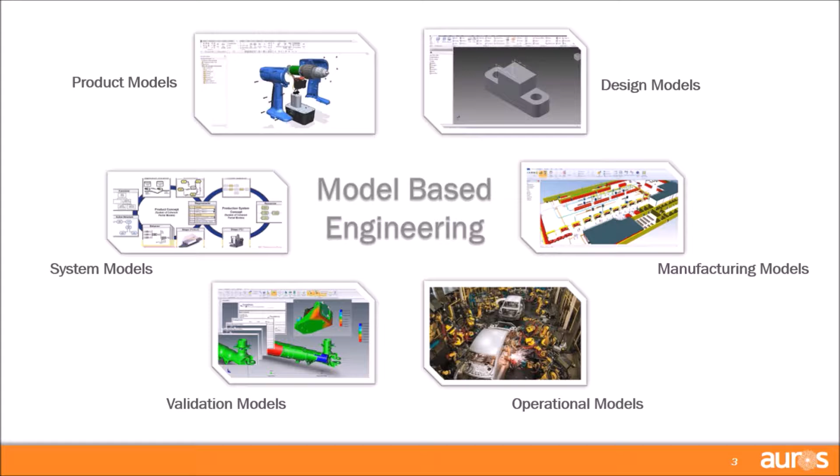We can also get details about those objects they're working on. There's tons of attributes and properties available, such as the material, what object state is it in? Is it a concept or is it a prototype? Is it in work? Just a wealth of information. CAD applications are ripe with content to use to detect and provision knowledge.

Now, one thing I often hear when I'm discussing this concept with people is that they often say, well, we have knowledge-based engineering, so our CAD application is already knowledge aware. And the integration of knowledge into CAD applications has been occurring for a long time, and knowledge-based engineering tools exist in just about every major CAD application. And there are tons of benefits to KBE, but there's also some limitations.

But the first misconception I want to talk about is: is KBE the same as knowledge aware? And what I'm going to say is, well, not quite, and here's why. There's three key principles to the knowledge-aware technique. The first principle is certainty and knowledge reuse. So does KBE have certainty and knowledge reuse? Well, sort of. For today's argument, let's just limit that focus to the CAD application, and we could say that, within that CAD application, that knowledge-based engineering tool does have certainty and knowledge reuse.

The second key principle is continuous product or process validation. Does KBE do that? Yeah, it does that, and it actually does that quite well. Within those CAD applications, or really whatever application that the KBE app is running in, it will continue to evaluate that model or drawing or simulation based on that app.

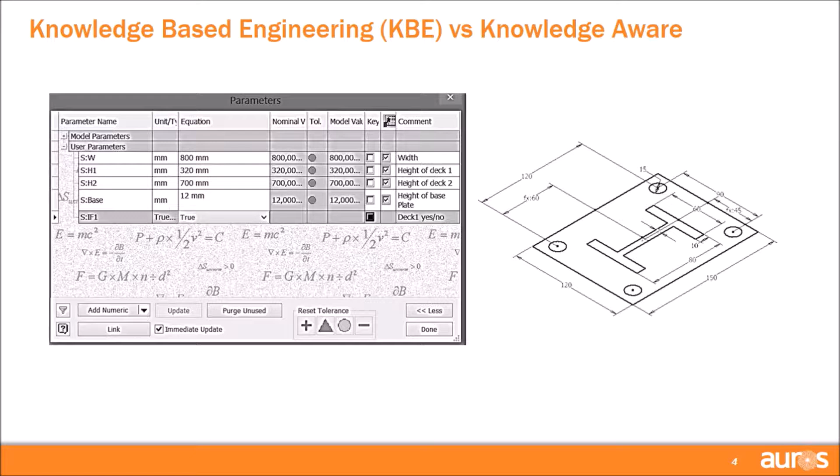So how does this all work? What's the details behind it? There's three key fundamental technologies that we use to make knowledge-aware work within CAD applications, actually within any application. The first is the knowledge packet. Second is an assessment control, which is like our navigation app. And the third is a rules processing engine. So let's break these down one at a time, just to give you a little bit of background as to what they are.

The first one I want to talk about is the knowledge packet. This is the what. This is the information that someone needs, the information that needs to be provisioned. Knowledge packets are purpose-built units of knowledge that represent a wide array of knowledge types. Knowledge packets are typically very granular and concise. And one key element about a knowledge packet is that during the creation process, it becomes ready for reuse. It becomes ready to be shared into many different workflows.

Now, when we're talking about CAD applications, there's a specific element within a knowledge packet that makes it very useful to share within a CAD application. This is called a value table. A value table is basically a little mini knowledge model. We can build these knowledge models within the knowledge packet and then distribute them into a CAD application. I'm going to go through that shortly. But this knowledge model can execute within those CAD environments.

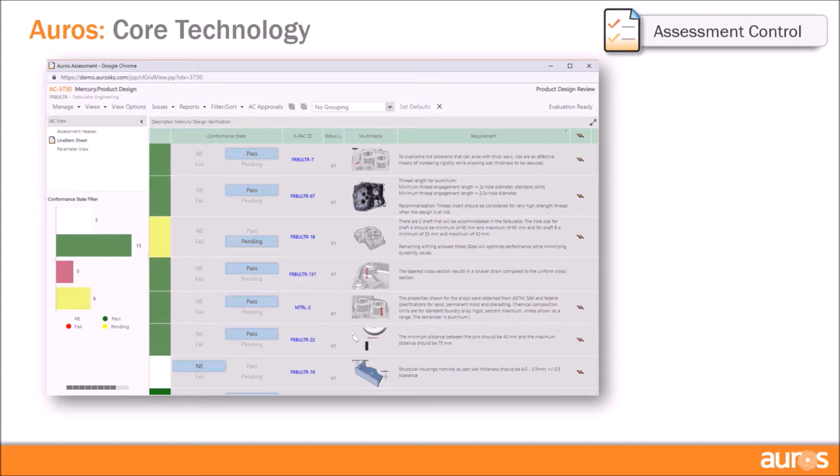Now, what you're looking at here is a grid view version of an assessment control where we can see status about a particular knowledge packet. When we're talking about CAD applications, we may want to take a different look at these knowledge packets, especially the ones that have those value tables, those little mini models, and maybe look just at the parameters. For that, we have an alternative view of an assessment control that strips out all of the other details and focuses just on the parameters and how they're being evaluated. This is often the view of choice for users connecting assessment controls to CAD applications.

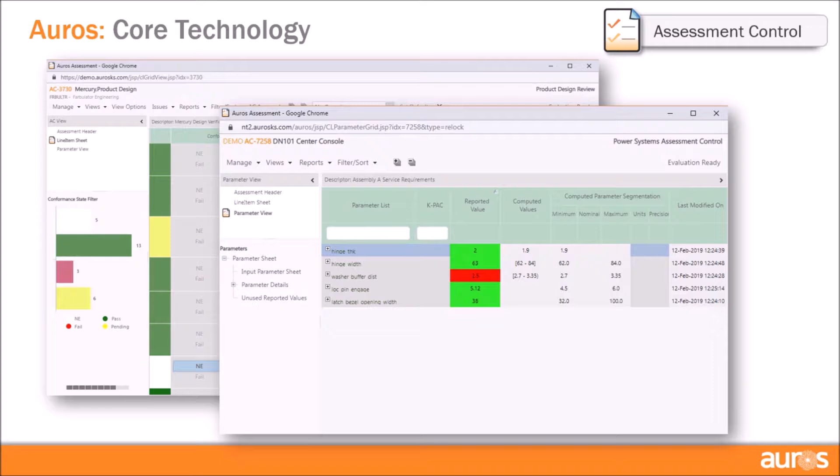Whatever these modeling tools are, the first thing that happens is we need to detect context from those tools and deliver that context to Auros. When we make that connection and that context is delivered, the relevant knowledge packets are collected and made ready to interface back to the CAD application. When we do that, those key parameters that we saw in the value table get passed from the knowledge packet, or an assessment control, to the modeling environment.

Now, when the parameters within that modeling environment are matched to the parameters that were delivered from Auros, with things such as features or properties or dimensions, the values for those objects get sent back to Auros for validation. This is where that rules engine kicks in. So based on those little mini models, when they're tied to a parameter value inside of the model, that gets pushed back to Auros, and the rule then gets evaluated.

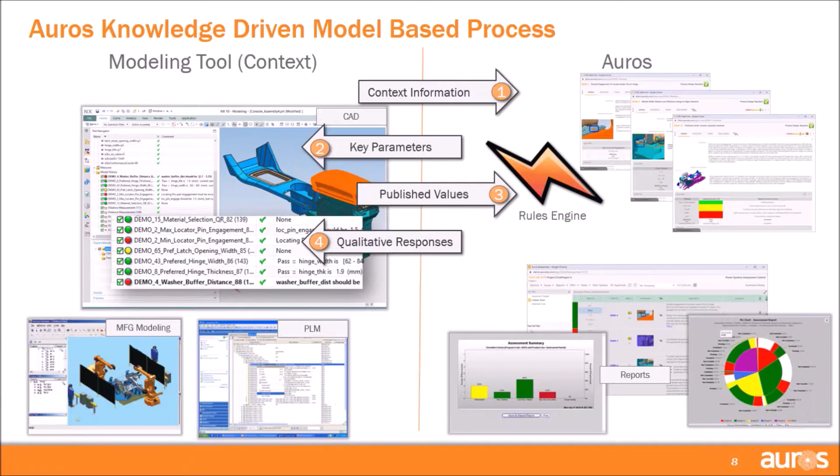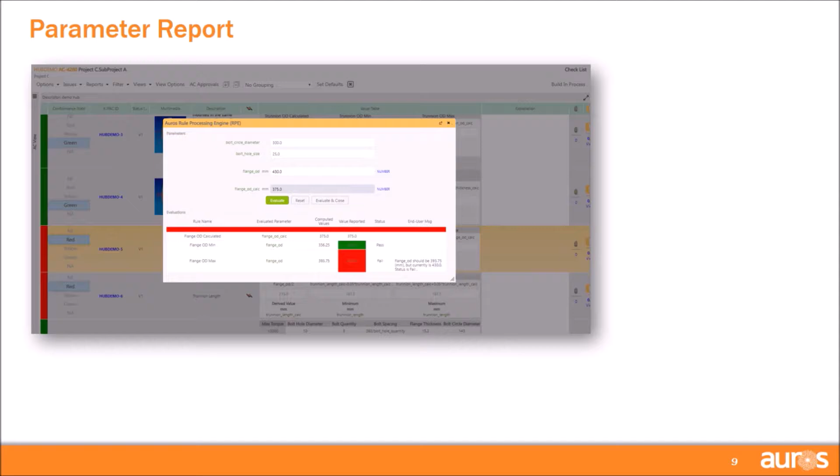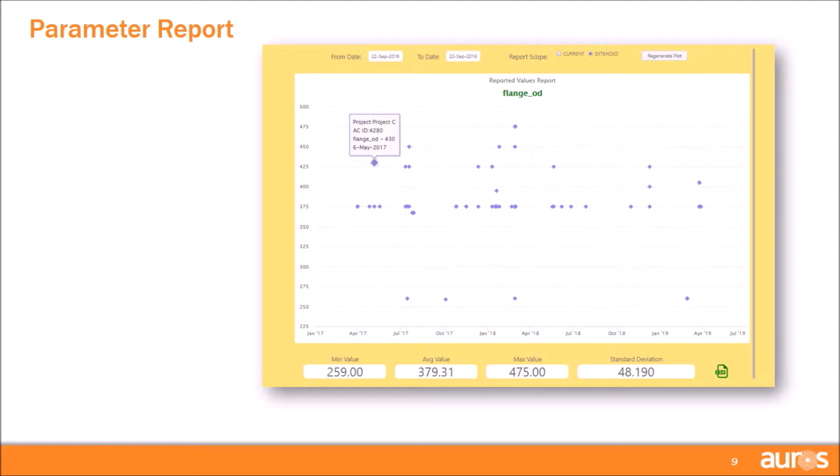And you can see 375 tends to be the most common entered value. And at the bottom we have some mins and maxes and standard deviations there. But this information is very useful when we're talking about learning from how knowledge was applied across past projects.

All right, enough about how it works. Let's talk about some common CAD Connector Strategies that we're going to review today. First, we're going to review nonparametric model validation. And I know many of you might be thinking, nonparametric model validation, we just talked all about all these parameters, and models are full of parameters. Why are we going to talk about nonparametric model validation?

That's actually another misconception I would like to clear up, is that you don't necessarily have to have parameters within a knowledge packet or within an assessment control and deliver those into a CAD environment. There's many workflows that really do not require that level of detail and require more of an attestation of the use of knowledge than the parametric validation of knowledge. So we're going to review that based on a shipbuilding workflow, and I'll go through that process.

Now the next one is freeform CAD, and I've demonstrated this strategy in the past. And freeform CAD is basically you take a model that doesn't have any parameters in it, and we manually attach parameters to the model to make it smarter and also detect status against that model. And I'm not actually going to go through this particular one today, but it is a very useful CAD connector strategy.

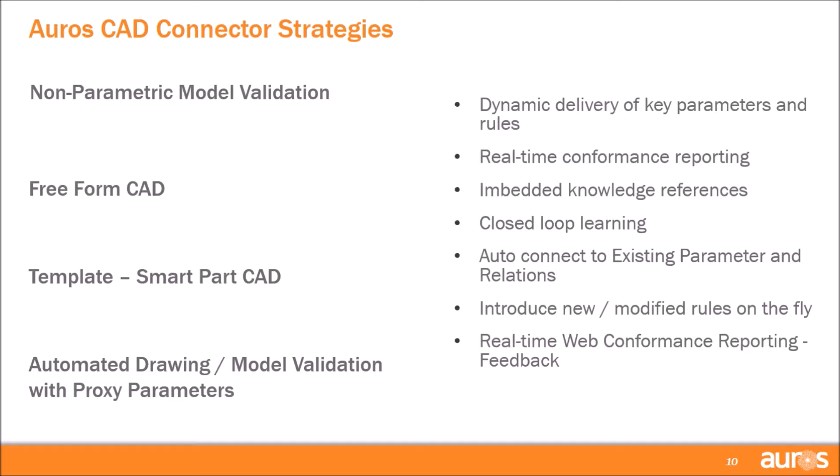You're going to see that closed loop learning, that third key principle that I discussed. You'll see how that information isn't just stored within the modeling environment, but it's also available for everyone outside of the tool, all these other workflows that may take advantage of it. Through some of the demonstrations, I'll show how we auto-connect to existing parameters and the relations. We're going to see new rules being introduced on the fly within the modeling environment. And then we're going to take a look at some of the reporting options and feedback that we get within the modeling environment as well as within Auros.

So one of the most commonly asked questions I get when I start talking about connectors is, which CAD applications can we connect Auros to? And I typically say all of them. But if we limit it to just the off-the-shelf connectors, we have off-the-shelf connectors for several of the major applications like Creo, SolidWorks, CATIA, NX, and AutoCAD. And not only just AutoCAD on its own, but for those of you in shipbuilding, we have a connector to ShipConstructor, which, as you would know, is an overlay that sits on top of AutoCAD. And this is actually going to be one of our demos.

So today, what I'm going to review with you is how the different workflows dictate the type of interaction needed by the Auros CAD connectors. And to show you that, I'm going to review 3 different connectors to see how they integrate the knowledge-aware approach. We're going to look at AutoCAD and ShipConstructor, the NX application, and we're also going to take a look at SolidWorks. So the first one we want to go through is non-parametric model validation. And like I said before, this was one of the misconceptions, that you have to have parameters to go back and forth between a model and Auros. And that's absolutely not true.

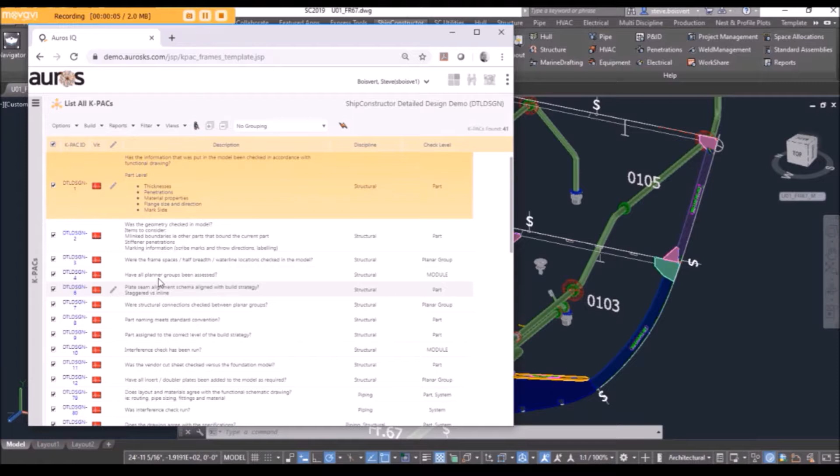What you'll see inside of Auros is, I'm going to start with the knowledge. So what was created? We have their knowledge repository, and what you'll notice is that these validations do not have value tables. I mean, this is a very simple check. Check the thickness, penetration, and material properties, but there's no value tables.

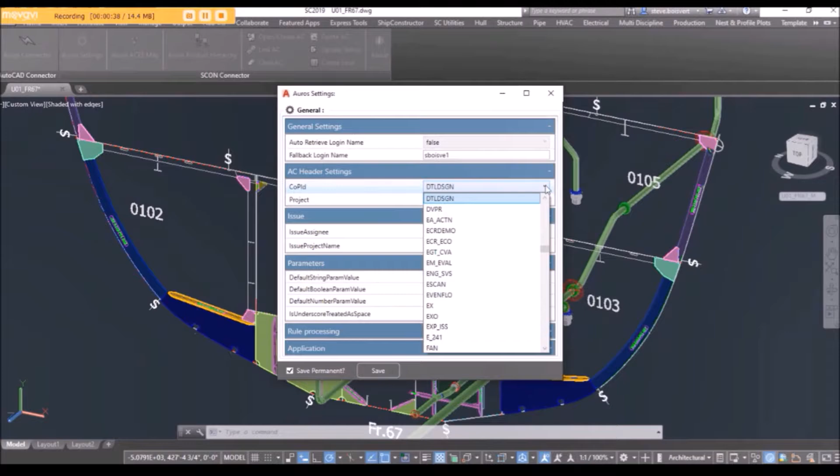So what we're going to see is how the Auros connector delivers knowledge, provisions knowledge in that workflow. And the first thing that the users do is they have to set up which knowledge they want to provision into the workflow. And for this, we define our knowledge source for detailed design. Another thing that they may want to do is to link certain CAD properties to certain Auros properties, which they can do here from this mapping window.

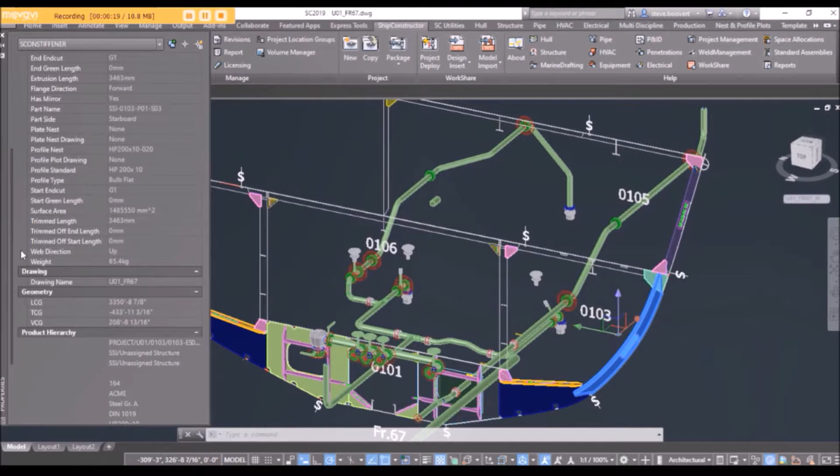And what happens now is when the checker goes into the CAD environment, they select an object, like we're doing here, and they can right-click to get a list of menus. And what I want to show you here, let's talk about context. If we look at the properties, this particular object is full of information we can use to detect context. Things like its profile type, its status, its thickness, its material, all that information's here. And for this workflow, what we need to know is whether it's a structural element, and which level, is it a part level?

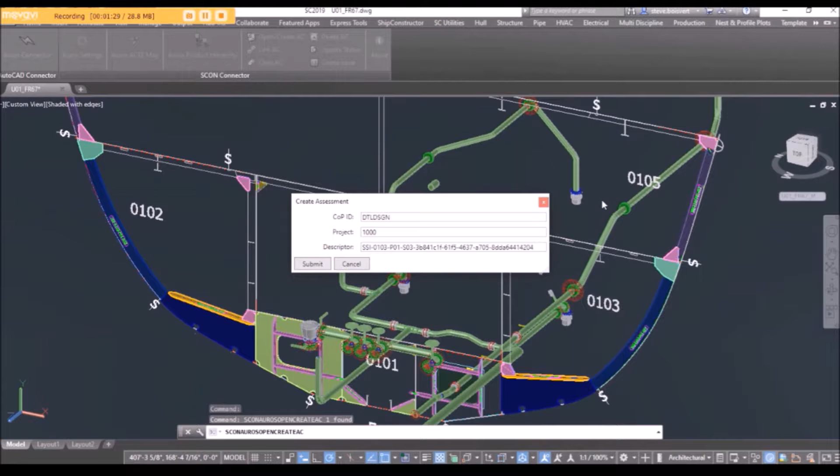And based on that, the users can create an assessment control. We can provision context of it being a structural element at the part level, send that to Auros, and Auros is going to allow them to develop an assessment for that object. And what you can see when we selected create an assessment, the assessment collected the right knowledge packets and delivered them back into the CAD environment in the form of an assessment. So let's take a look at this real quick. If we look at the Auros properties, we can see that an assessment was created on that part, it's evaluation ready, and the overall roll-up status is white or not evaluated.

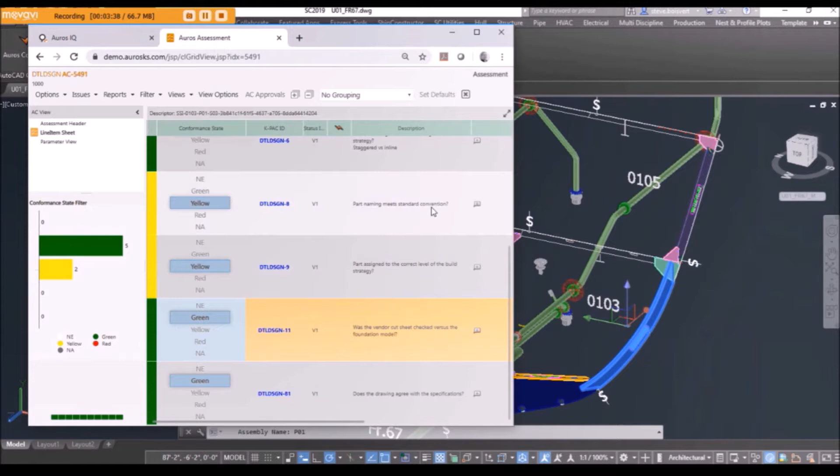So now we go in, open the assessment, and start to evaluate it. Remember, we're just going to attest that these things are right. So for my demonstration, I'm not going to put a lot of time into it. I'm just going to select some statuses, red, yellow, green. Maybe make this one green, and we'll do this one green, and now everything's complete. You see there's no more not evaluated. We can look at the header of the assessment, and we can see that information from the part was sent to Auros and stored within the assessment, like the part GUID, basically the ID for that part, as well as some other information, the product or project code.

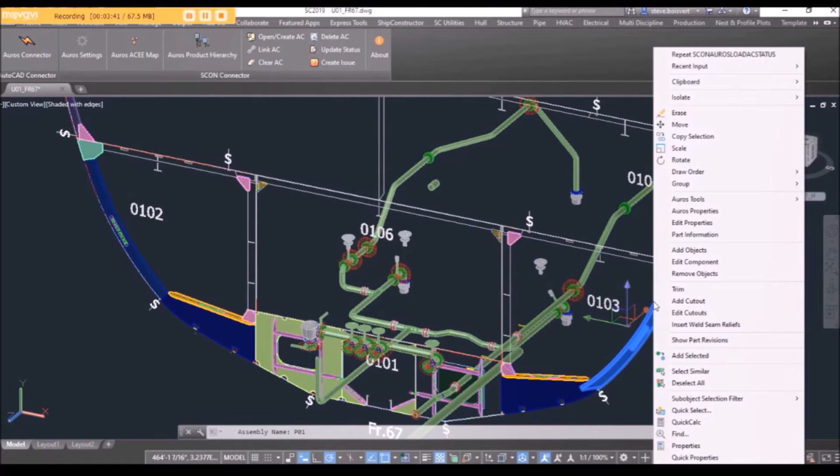But if we go back and look at those properties, what happened? We still have the assessment ID, but now the status is yellow. So when I was doing that evaluation, this part became aware of its rolled up status. So it's very beneficial to the individuals that check these components, because now that information is stored within the CAD application as well as within Auros. So if I wanted to report on which components I have checked, which ones I haven't, and what their statuses are, I now can very easily see that. So not only did we standardize the workflow, but we made it very efficient for the different checkers to get to that information and utilize it within the CAD application.

Now, the next demonstration I want to go through are template or smart parts. And for this one, I'm going to use NX, and then we're also going to see a little bit of this in SolidWorks.

So for this demonstration, we're going to start off in NX, and what you're going to see are two simple hub flanges. The one on the right is the actual part, the one on the left is just a dummy part, a clone. I do that so when we push information in from Auros, you can see the changes.

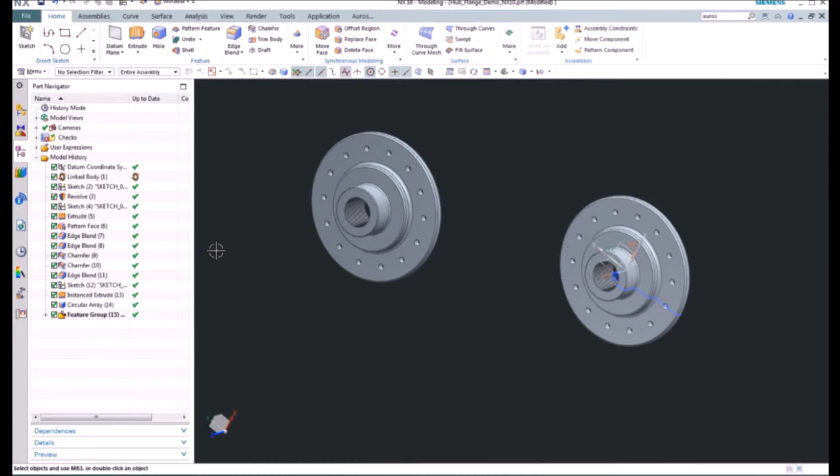So this workflow is a little different. We're not using the CAD application to send context. We're going to start from Auros to send information into the CAD model. And what you're going to see is the CAD model is already aware of parameters. You can see in the sketch here that it already is aware of the parameters I'm going to send from Auros to the particular model.

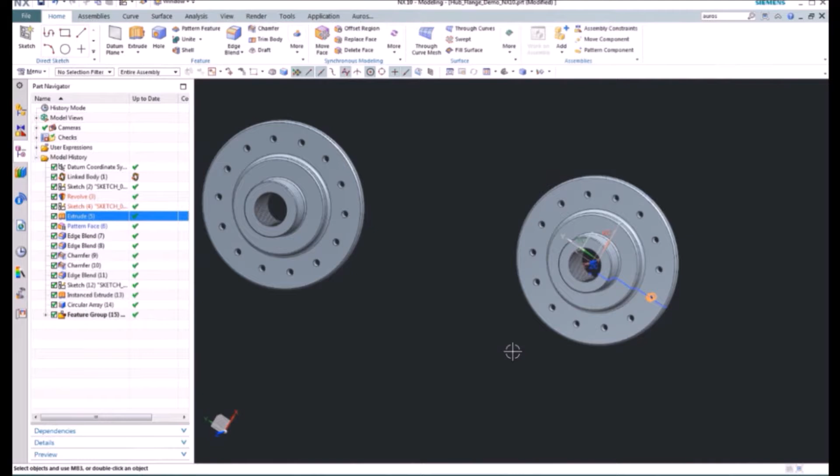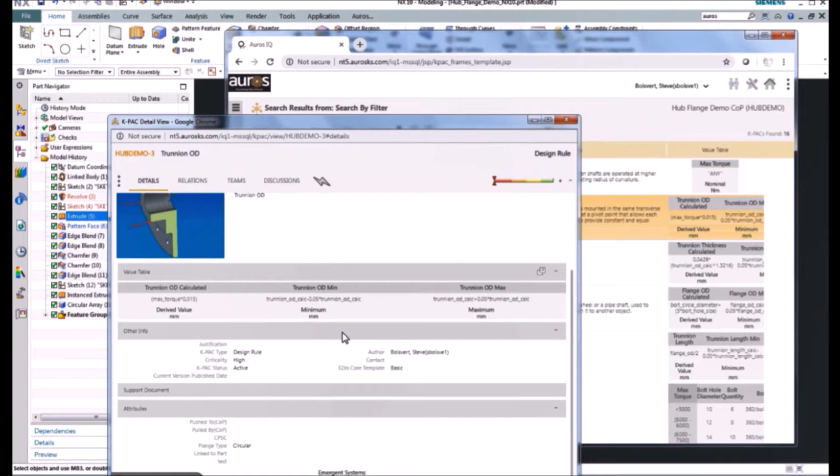So we're going to go to Auros, and for this we're going to open up our hub demo, and I'm providing context. So I know I have a circular smart part. For this, I collect the right knowledge packets related to the circular smart part, and you can see some of those here. What you'll notice is that the value table on all of these knowledge packets is completed, so there's some logic or many knowledge models built into every one of the knowledge packets.

So if we build an assessment control, we take that collection of knowledge packets and we're just going to give it a quick project here. I'm going to give it a description of 15,000 Newton meters.

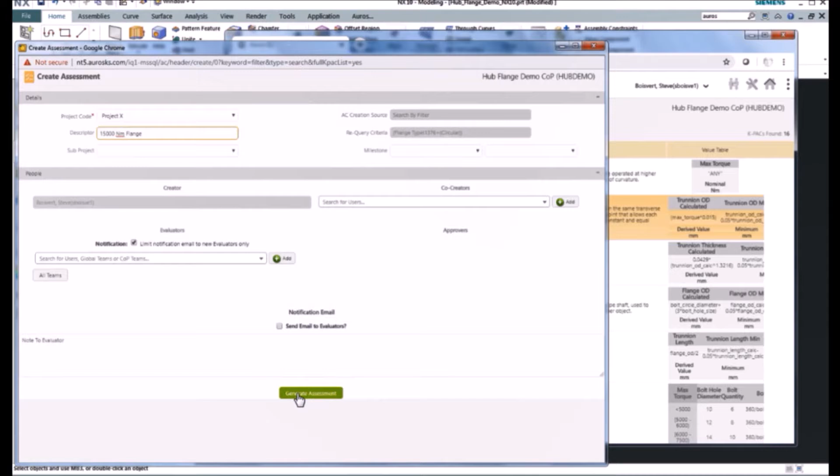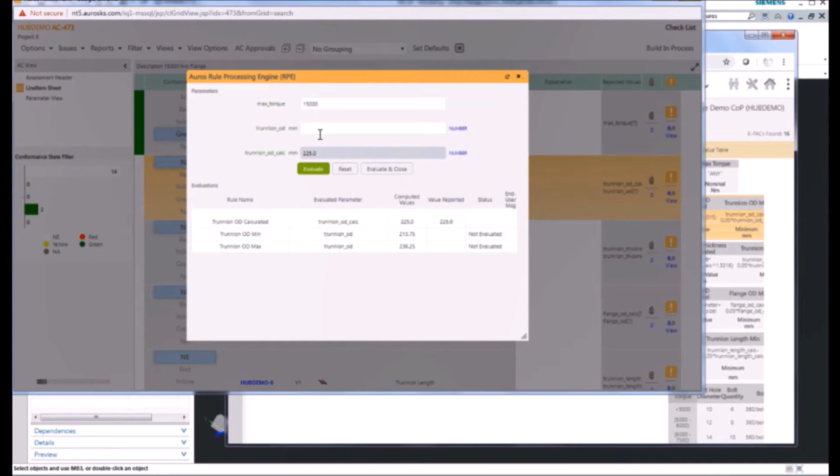This particular workflow is very reliant on the torque. So I have my assessment control in the detailed view, and if I click the rule processor, I'm going to put in my inputs. What's my max torque, 15,000 Newton meters. Maybe I got that from the customer or the sales team. But now that max torque is then sent into all of the other evaluations that need that input, and I'm able to start creating and generating values for all the different features of the model.

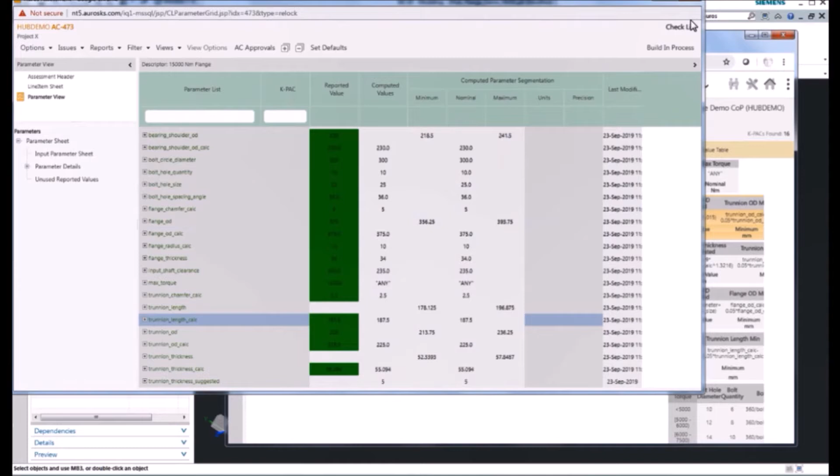Like I mentioned before, one of the key views for CAD applications is the parameter view. So we switch over to the parameter view. I'm looking at just the parameters that are needed, and I can see on the right-hand side what are the computed values, what are the max and mins within those computed values. So I'm filling out my, whatever you want to call these, maybe these are best practices or it's the design guide. I'm going to fill that out, and then I'm going to go to my CAD application.

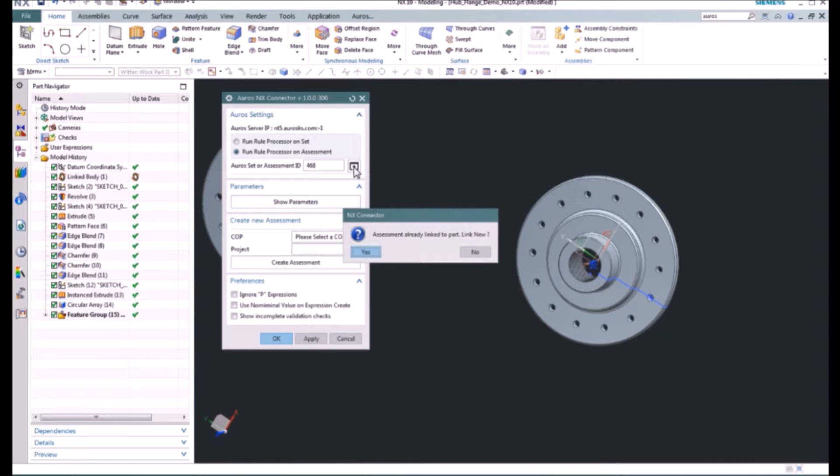Now within the CAD application and within NX, we're going to go to Tools, we're going to open up our Auros Connector, and then we are going to tell the Auros Connector which assessment to connect to. So we're going to connect it to assessment 468. And if we look at assessment 468, here's that 15,000 Newton meter flange, and everything is filled out, everything is green, meaning I'm meeting all of my best practices. What the system expects me to have, that's the values I'm providing it.

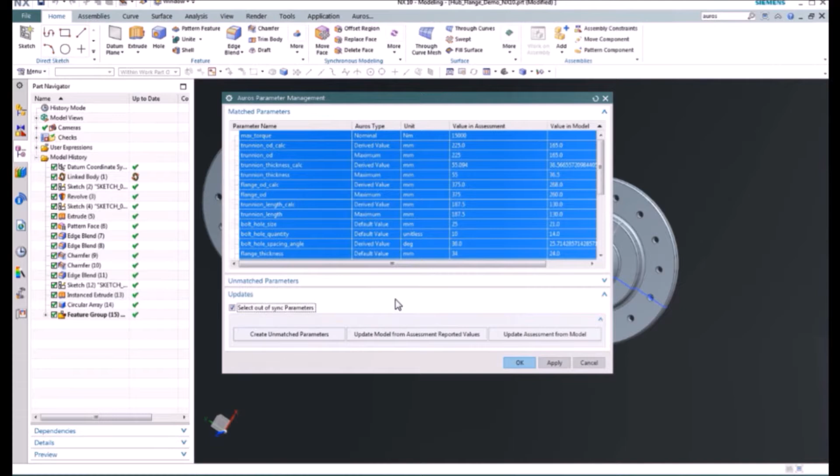So now within the CAD application, I want to look at the parameters. I can see the values in the model are not the same as the values in the assessment. So like flange OD is 260 in the model, 375 in the assessment. So I'm going to update the model from the assessment, basically push the values from the assessment into the model and see how it reacts.

So when I do that, the model updates, and what you're going to see is the status of that information has been provisioned into the model, and I can see the status within the part navigator. Here's all my greens, here's my links to my knowledge packets that are in that assessment control. So here's some of the parameters, like the flange OD that we've looked at before.

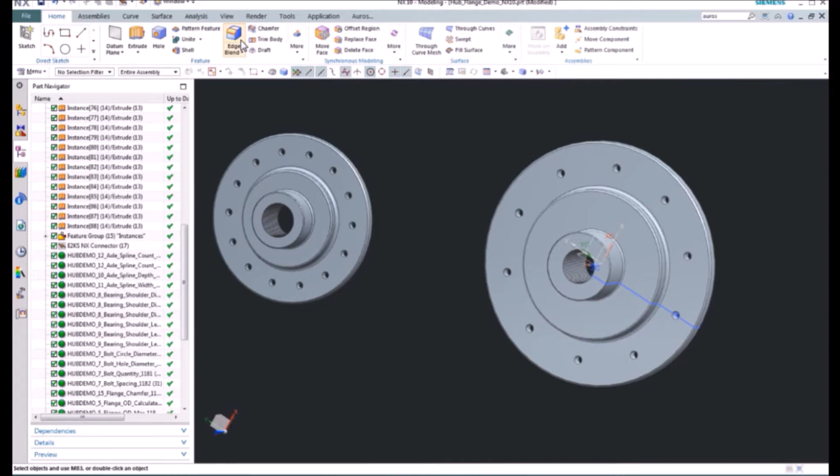And what happens now, we talked about continuous product and process validation. What happens if I change this? What if I decide to make it 450? So I can change that within the model, and the model is going to let me do that. And what you'll see is the flange radius increases.

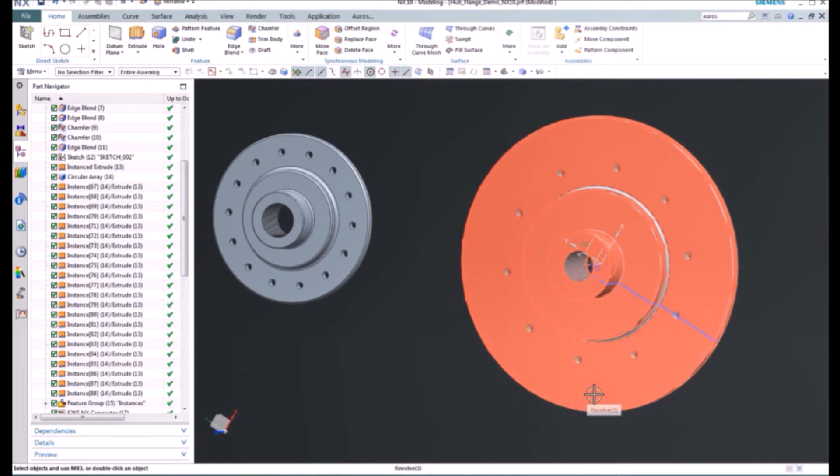And what happens now, if I look at the part navigator, my visual indicator of status now shows me that I'm red. And it's also providing me with some information. It's telling me that my max should be 393, but I'm currently at 450, so I'm failing, which is very beneficial information to someone working in the design environment.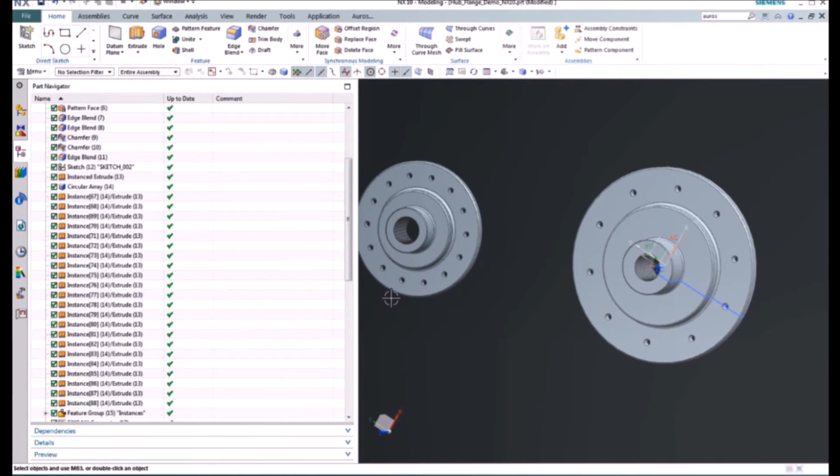So I'm going to set this back to 375, and the model is going to update back. And what you're going to see is I'm now back to green.

So let's switch over to SolidWorks. Same kind of model, same setup. I have my global equations here, with max torque, trunnion OD, the same criteria that I just saw in NX. If I look at my sketch, same thing here. I have my sketch defined.

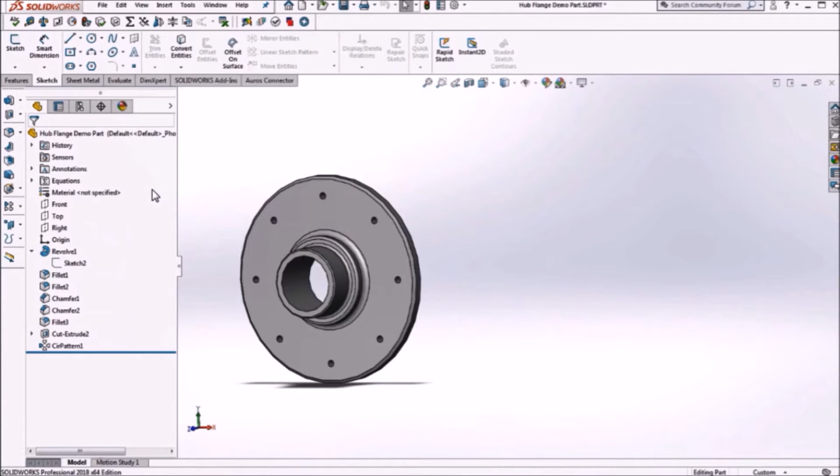I have those sketches linked to the parameters. So let's open up our Auros connector, our SolidWorks connector. It looks slightly different than the NX connector, but that's okay. What we're going to do is link it to that same assessment, 468, so I'm going to load that.

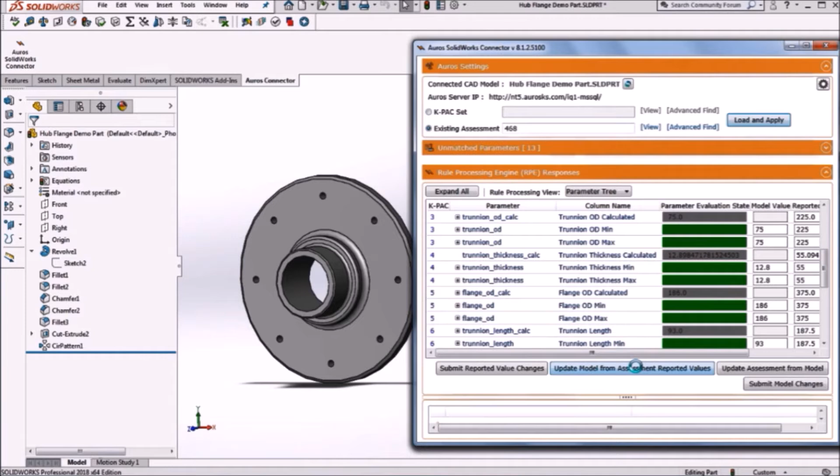It's going to ask, do you want to apply the changes? Yes. Same thing as in NX, what you see on the far right-hand side, the model value and the reported value, and they're not the same. So I'm going to update the model from the assessment reported values. You'll see the model update.

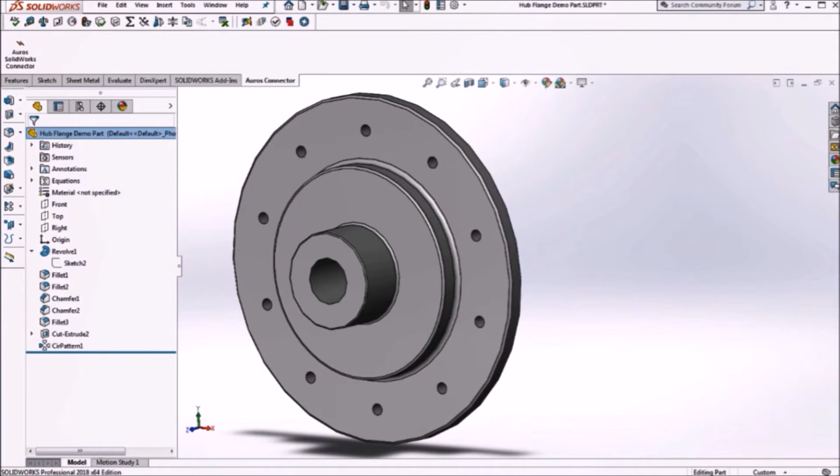Now I've just utilized the same knowledge within two different CAD applications, two different models, same common knowledge set. This is extremely beneficial to a lot of our tier 1 and tier 2 suppliers we work with in the automotive business. Many of you support multiple CAD applications, and many of you support KBE within both of those CAD applications. So what you really have is redundant knowledge, which makes it very difficult to modify.

If you modify one, you've got to make sure you modify the other, so things become out of sync. So one of the key benefits with the knowledge-aware technique is it becomes CAD agnostic. It doesn't really care which CAD application you're in. The same knowledge packets can be shared across all of the CAD applications, leaving you with one core set of knowledge to be managed. It gives you that single source master. So if you have to make an update, you update it in one place. All of your downstream workflows will benefit from just that one update. So very efficient in terms of maintenance and even creation.

All right, last demonstration. We're going to talk about automated drawing and model validation using those proxy parameters. So real quick, let's talk about these proxy parameters again. These proxy parameters are basically KBE automations that are going to run within the model, and then we're going to tie parameters from Auros to those objects.

So for this, I have just a real simple part. It doesn't matter if it's a part or assembly. There's no built-in parameters for this one like I had on the last one, but if we look at the part properties, there's still a ton of information I can use to detect context. All of these part properties can be used. And for this particular demo, I'm going to focus on the state, the concept. This particular object is in the concept state.

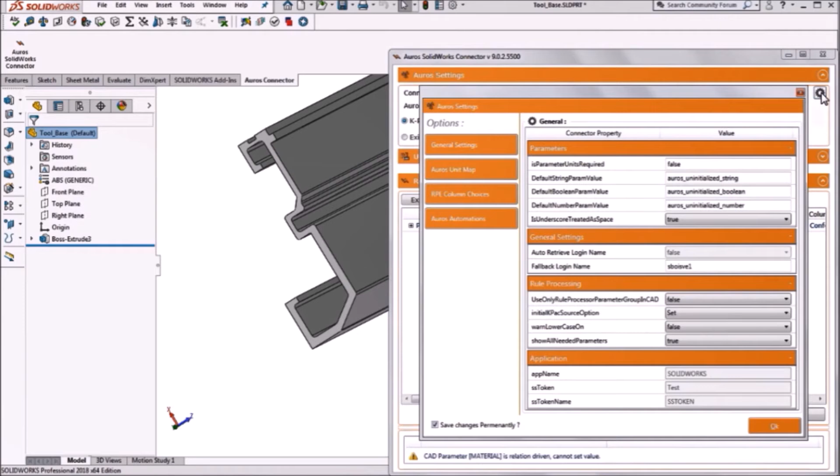So for this, I'm going to open up the Auros connector. And what you're going to see is that it's already linked to a set, basically some knowledge already assigned to it. Now, if we look at the settings, you're going to look at these Auros automations, the KBE, knowledge-based engineering automations that exist within this model.

So is the sketch fully defined? Are there suppressed features? Are there errors and warnings? That's an automation that can run - the error and warning one will detect whether there's that little symbol there in the sketch. So it'll go through the part history, look at the sketch, each sketch. If it finds that, it creates a parameter with a value, and we can attach a parameter to that and then do some rule processing.

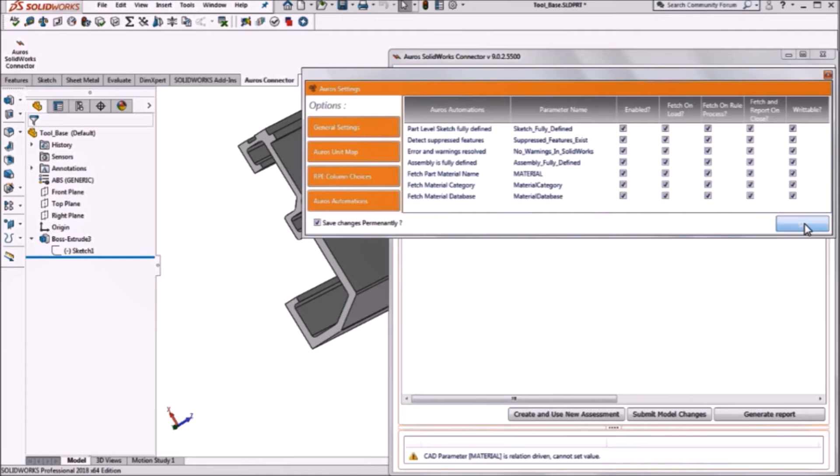So now what we're going to do is, for this particular workflow, we need to build an assessment. So I'm going to create and use a new assessment. So my fake project, I'm going to give it a quick description, 2019 conference demo, and I'm going to create a new assessment.

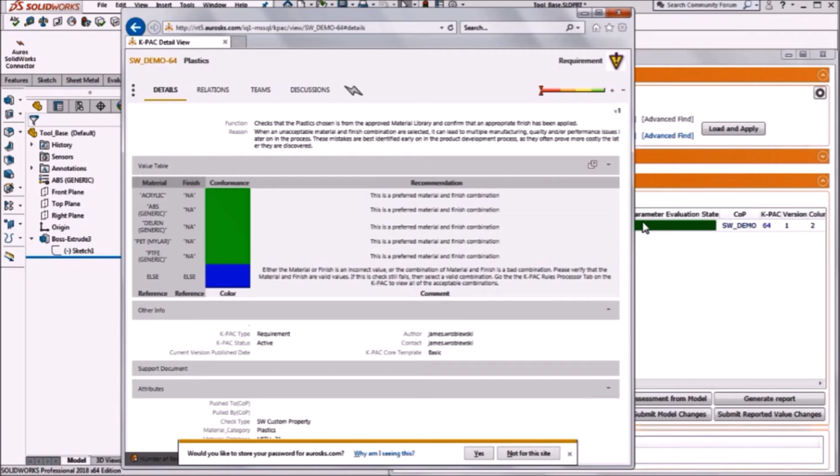Now what you're going to see is immediately what happened was there's a change. You may not have noticed it, but there's a change. That original check now changed to a material check. And this is based on one of the automations that we had, I just showed. Based on the use of an assessment, if the model is in concept stage, it wants to look for the material and make sure the material is an approved material and material finish, which it has done. And that's all done based on the use of metadata on each of the knowledge packets within Auros.

So now, if I go up to the part properties and I change my state, I'm going to change it to in work.

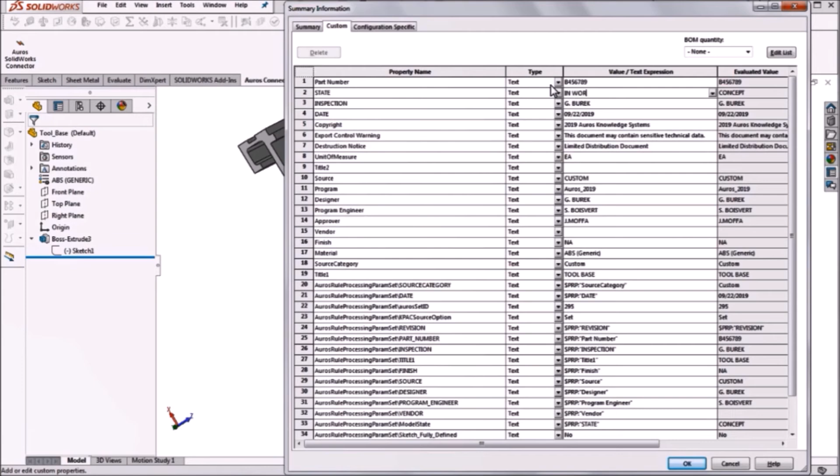So I'm changing my model properties, changing context. And if we take a look at the connector, when I change context, there's another automation that's going to run looking for in-work. It's going to find all the knowledge packets related to the in-work state and deliver them back into my connector, into my model.

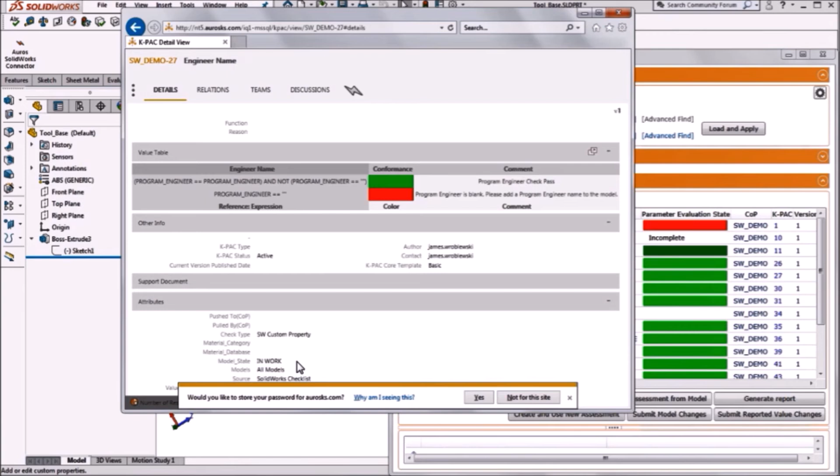You can see that many of them auto-evaluated themselves based on the information found in the model. Some are incomplete, some evaluated to green, some to red. If I want to look at the embedded knowledge reference, I just click the link to the knowledge packet, and I can see this one has been assigned the metadata attribute of in-work.

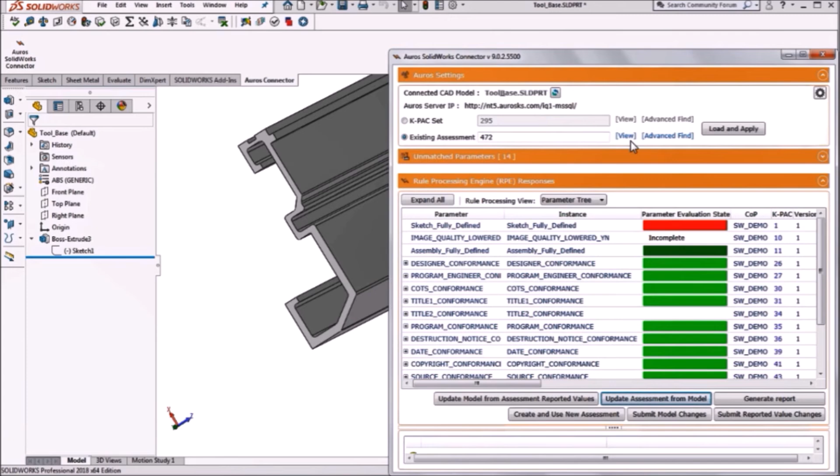And if I want to update the assessment, I can set up criteria to do it on load or on model changes, or I can manually push those changes into the assessment. You can see the values from the connector have been pushed into the assessment. So here's that red one we were looking at.

Are all feature sketches fully defined? It's picking up a value of no, as we saw that the sketch wasn't fully defined. And if we want to look at the dynamic delivery of knowledge, you can see all these knowledge packets added into the assessment. All I had to do was change context, and it brought all this information in dynamically into my model. Very beneficial.

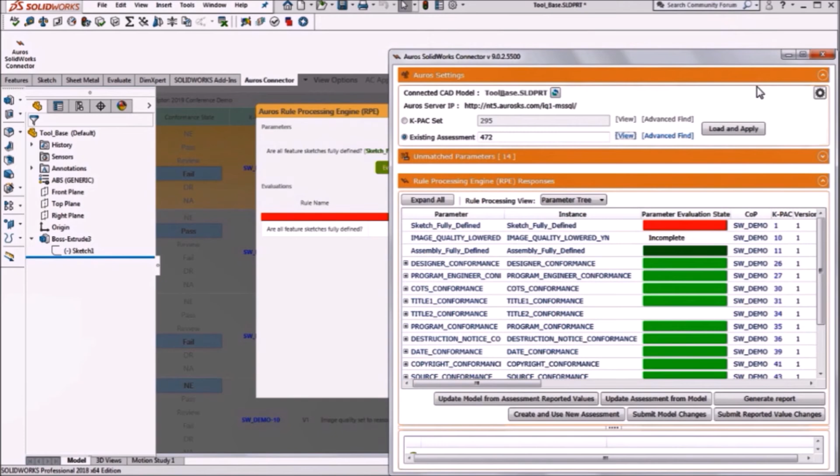There's a lot of power in connecting not only knowledge to the CAD or model environment, but also connecting knowledge-based engineering automations to the knowledge-aware technique. A lot of power there. You can see how quickly things are evaluated, how dynamic the knowledge delivery can be within the modeling environment.

So what did we cover? Is knowledge-based engineering the same as knowledge-aware? It's not quite the same. There are benefits to KBE, there's a lot of benefits to knowledge-aware, and there's even more benefits when you connect KBE to the knowledge-aware approach.

We took a look at some of the workflows. We looked at the non-parametric model validation—a little less fidelity in that workflow because it relies on some attestation, but still very beneficial. There's a lot of efficiencies there, some standardization, all the reporting that occurs. If there's any new knowledge, there's a place for it to be delivered into, so that synchronization all happens.

Freeform CAD, another valid workflow that we didn't show—if any of you would like to see demonstrations, just contact us. The smart parts, smart templates, you saw that one with the hub flange, starting from the assessment control. We define the context and deliver that context to the CAD application. Then we saw how the model responds to changes, not only within NX, but also using the same knowledge within SolidWorks.